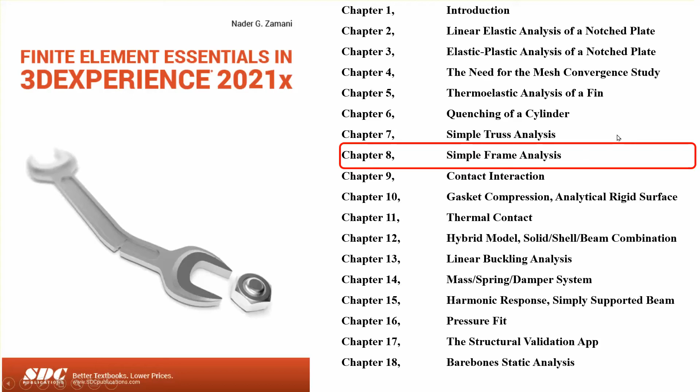Okay. So basically, we have a situation like this. We have a frame structure. These three pieces are welded together, therefore it makes a frame. And there are restraints that you can see here. Two of them are fairly straightforward. The third one is at a 45-degree angle, so we have to do a little bit of extra work here.

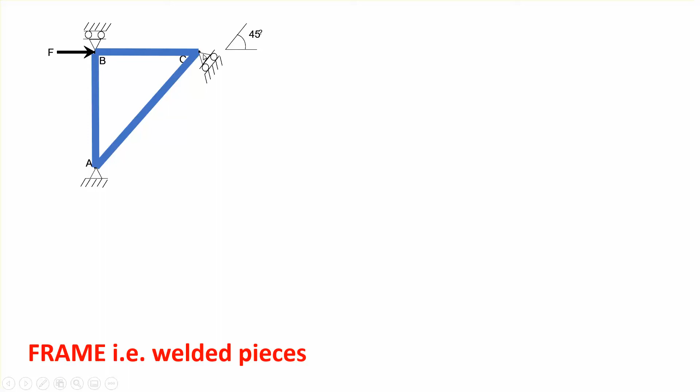And a load is applied, and the cross section of these three members, two of them are the same, and it's 24 by 24 millimeters squared, and the third one, the slanted one, is 34 by 34 millimeters squared. Okay, so what we're going to do is we're going to create 4 points and 3 lines. The 4 points, three of them are used to define the geometry of the frame, and the fourth one, which is down here, is used for specifying the orientation of the rectangle or the cross section.

Because remember, if the cross section is a circle, it doesn't matter how it's oriented. It's always a circle. It's perpendicular to the length of the member. But if it's a rectangle, for example, or anything but a circle or a circular tube, then the orientation impacts the deformation of the structure.

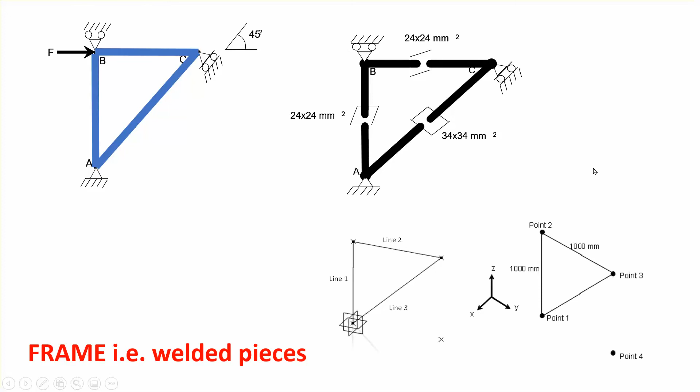So yeah, the coordinates are given here, and the material properties are standard steel, and the load is 1,000,000 Newton. Now, notice that when you do it as a frame structure, because the shape of the cross section and orientation is important, this is what you got. The top one is the 24 by 24 square cross section, and this is the slanted one, which is 34 by 34 millimeter.

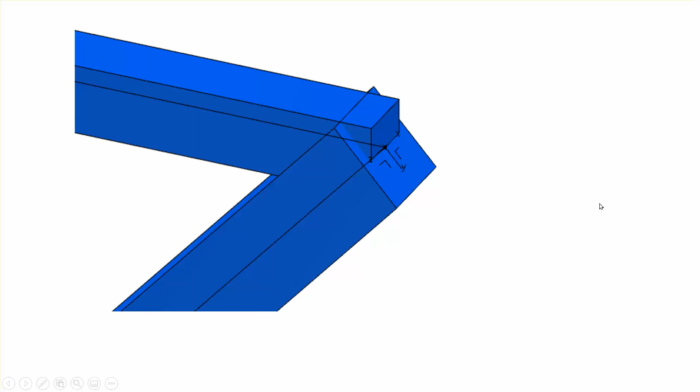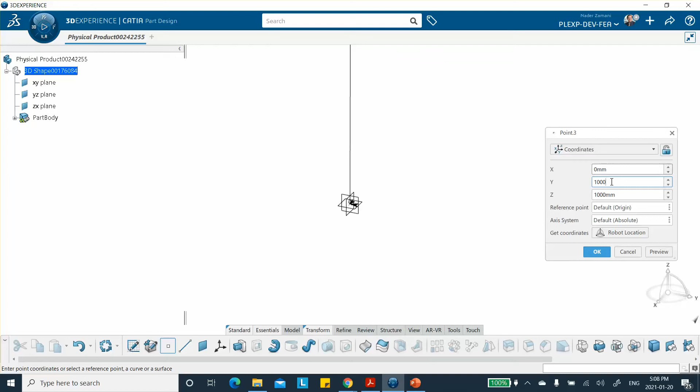Okay. So let's go ahead and do that. Let me start with the part file. I'm going to create 4 points. Let's make 0, 0, 0 point number 1. Then we go up by 1,000 millimeters. Then we go to the right by 1,000 millimeters. That's point 3. I think that's what you got. Let me see what you got here. Say okay, we may have to change some of these.

How many points do I have? This last one, I didn't need it, so I'm going to delete it. Okay, so let's put everything on the screen. So we have point 1, point 2, point 3. Okay, so we add another one, which is bringing it down to 0. So this is point 4. This is the orientation point here. So 1, 2, 3, and 4.

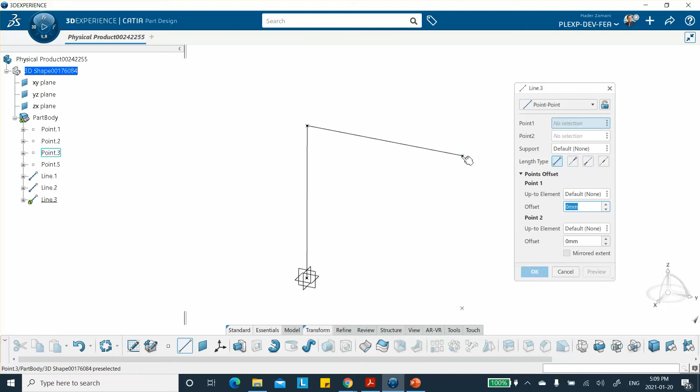Okay, good. Now we're going to create our lines. So here is line number 1 going from here to here. Line number 2 going from there to there. And line number 3 going from here to here.

Okay. The other thing is that when I did chapter 7, I did not create a local coordinate system. So to specify the displacement correctly on a 45-degree angle, I ended up rotating the coordinate system that the dialog box gave me. So here, as it's done in the book, I'm going to create an axis system. See that? The axis system.

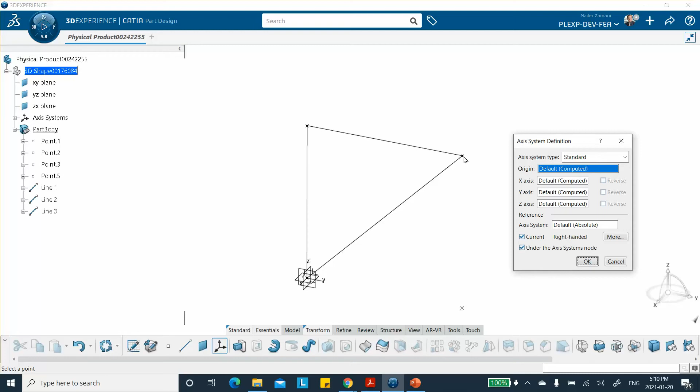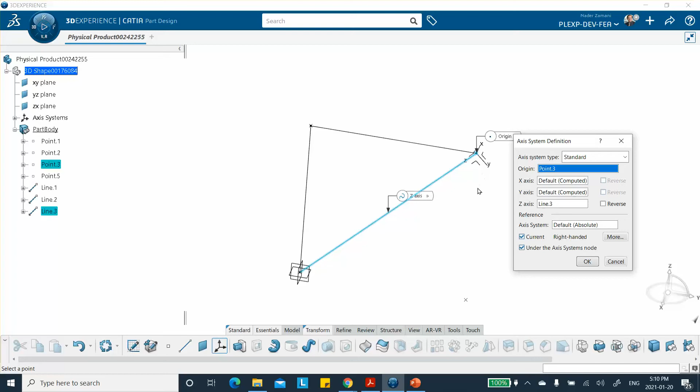It says, where is the origin? The origin, I'm going to place it right there. And it says, okay, how are you going to line these up? So I'm going to line it up so that this is my x-axis. I think in the book, this is your x-axis. Let me double check on that. Actually, let me just check. Sorry, the z-axis lies on this line. So z-axis, you select this, is on that line. Okay, so this is how it's done in the book, but as I said, in chapter 7, I didn't do it in this way.

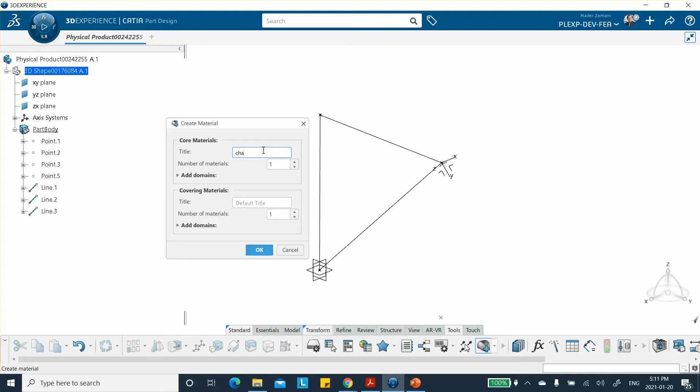Okay, so first thing we're going to do is save everything. Okay, so material. So let's apply our material. Add the material. Let me call this chapter 7. So it's going to create a shell for me with the name chapter 7 right there.

And I can specify the material properties right here by right clicking: simulation, structure, Abaqus multiphysics, mechanical, elasticity, elastic constants. This is 200e9 Pascal, which is going to convert it to PSI, and this is 0.3.

Now, if you wonder why I'm using PSI, because I was too lazy to change that. So in fact, if I go here, preferences, I'm going to go to stress. Let me maximize this. I'm going to go to stress and change that to Pascal.

Where is this pressure? Stress. Let's see, stress is somewhere here, right there. We're going to change it to Pascal, right there, and close it. So now, if you look at the properties here, you see that this is in Pascal, written in Pascal. Okay, good. Now I'm going to right-click, apply.

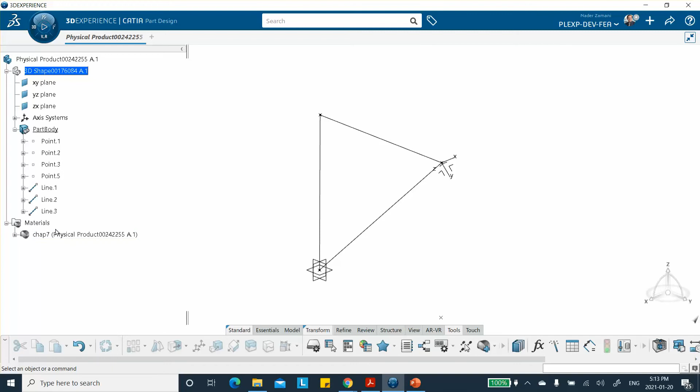I'm done with this window, so I can either minimize it or close it, and then I go to the part. You put it on the part, and basically apply it. So check mark, and there we are. Your material is right here, and if I double click this, the numbers are going to pop up. Now in the book, when I do these chapters, sometimes I do this thing differently. I create an empty shell here, and over here, when I double click on it, I fill it in. Okay, so slightly different way.

Now, the other thing I want to do is I want to hide these points, and there is a reason. Actually, point 1, 2, and point 3. 1, 2, and 3, I'm going to hide them. And there is a reason, because I will apply a force and some restraints at these points, and in some software, if you apply it to a point which is sitting on top of this vertex, it won't see it. Now I didn't try it with this program, so I'll just hide it so that there is no issue.

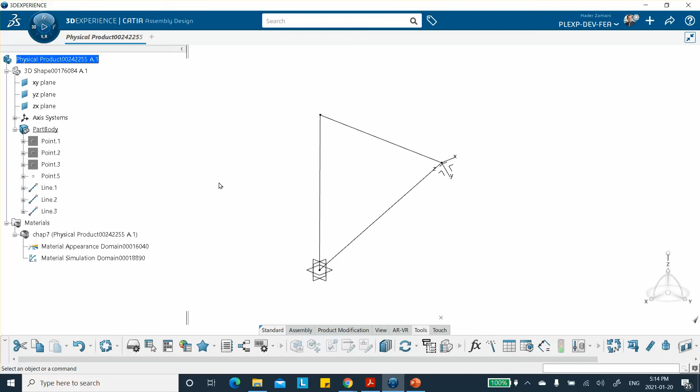With number 4 we have no problem. With number 5 we're down here. This has number 5 because I already inadvertently created number 4 and I deleted it. Okay, so that's fine. This one we don't have to worry about it. Okay, so we're done as far as this is concerned. Now we're going to go to structure model creation. We use all the defaults. Okay. So let me go ahead and mesh this thing.

To mesh it, notice that there is this hidden toolbar here. So there is a mesh there, right there. Okay. Notice that as soon as I went to structural model creation, it created the finite element model, but the elements and properties are not generated here yet. Okay. So first of all, let's go ahead and mesh this thing. So this is a beam element.

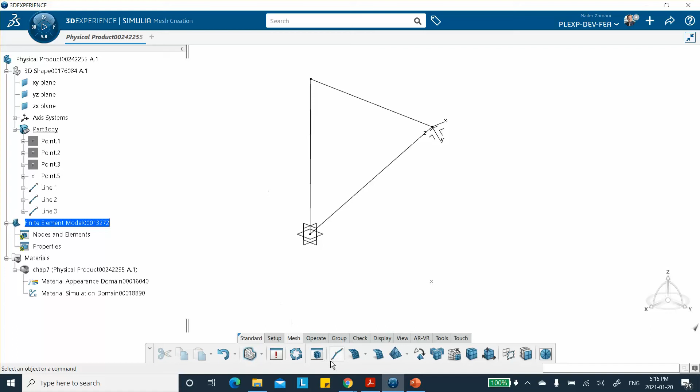Now, in the previous chapter, I put one element representing this entire bar. Now here, because I want to show bending, I'm going to make sure that the mesh size is 100. That means it will put 10 elements through that length, okay? And this is very important because I want the nodes from the top bar and the horizontal bar and vertical bar to be identical. That means if there are any nodes within 0.1 millimeter of each other, you may have to adjust this thing. For here it's okay, but in some problems you have to adjust it, okay? Then merge them, okay? So that's fine.

So did I select? Let's start with this one. Select this and mesh it. Notice that it put 10 elements to this. And then we say okay. We can actually do it simultaneously here, but I'd rather not, because the elements here will have a different cross section than this slanted one. So I better not do them all in the same dialog box.

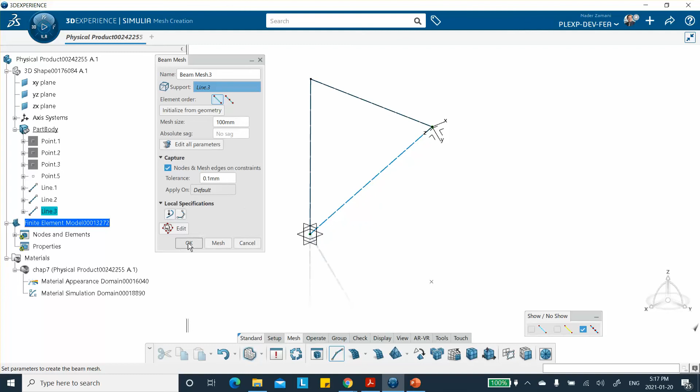So say okay, and then again, where's this? Then again, this one, everything is the same as before. Mesh. So put 10 elements here. These two I could have done at the same time, okay? And finally, that one, why don't we use that same meshing size, mesh, well, this is more than 10 because the length of this thing is more than 10 actually. We say okay. So notice that the elements have been created. Now we're going to have to do the properties.

Now, in order to do properties, first you have to say what kind of a cross section you have and how you orient it in space. Now, to do that, you can't do it in meshing. You have to expand this thing and go to model. See that? Model. You expand this, you go to model, and here are the different types of cross sections that you have. For example, you look at this last one. This is for beams and bars and things like that. First of all, the beam profile. In other words, give me the shape of that. So we have two profiles.

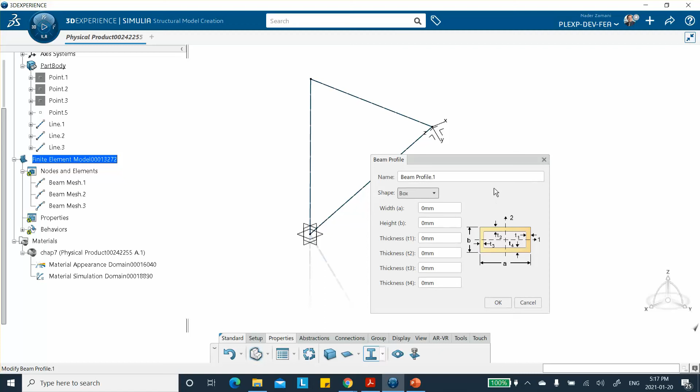Profile one, would it be a box, right? No, not a box. Cancel. Not a box. So I want a rectangle. Where is the rectangle? Rectangle right there. Okay. So it's going to be 24 by 24. 24 by 24. Okay, so this is profile number one. You can see that it's created here. Then another one. This is also a rectangle, but this one is 34 by 34.

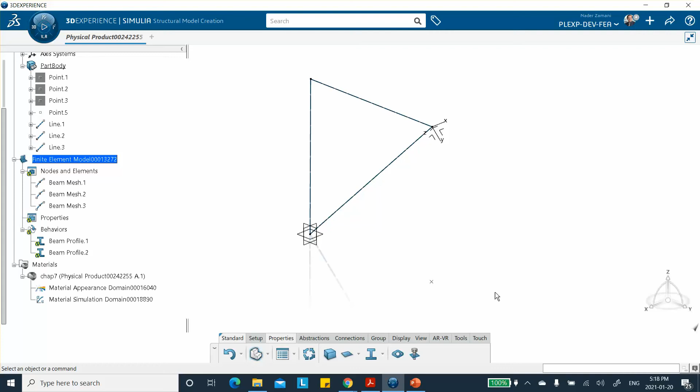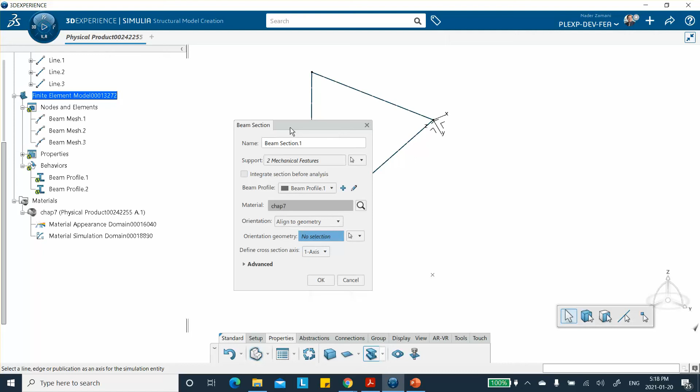Okay, good. Now that we have created the profiles, we can go and create the sections, okay? Beam sections. It's going to ask, what is the support? So let's do these two first, these two, okay? So this guy, can I do it at the same time? And that guy, too, these two have profile number one, and the orientation point is this point number 5 that I created here, and say okay.

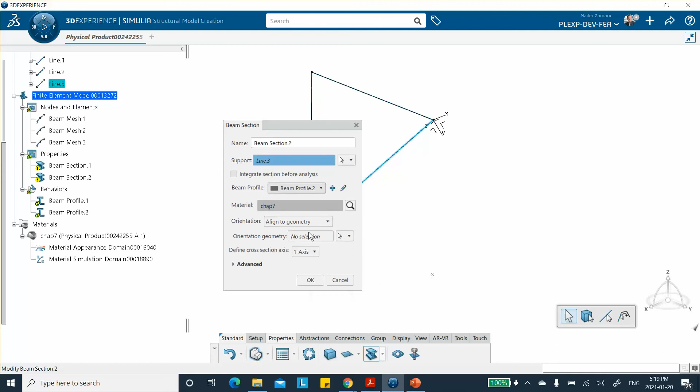All right. And for right, that's this one. And for the second one, beam section, this guy has profile number 2, and the orientation point is this one. The choice of the orientation point is, I don't want to say it's tricky, but if, for example, this is not the way I've drawn it, then you have to make sure that you understand what the orientation point does. So that's okay. I don't know why I didn't get the first one though.

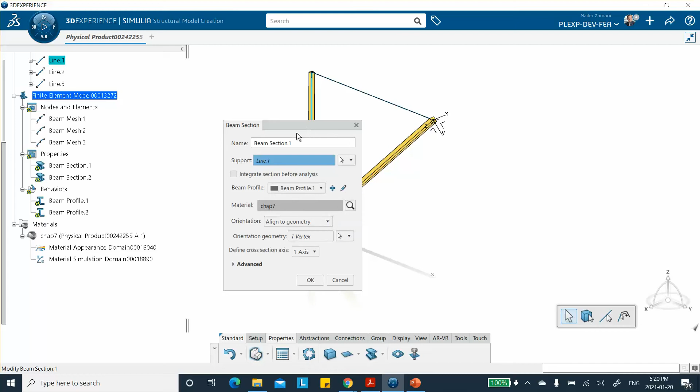Let's check this. Something is wrong here. Beam profile. I have a feeling that it doesn't like two of these. So let's try to get rid of this. Yeah, I guess you have to do this one for every line. So that's okay. And do another one. So for that one and profile number 1, for some reason this doesn't like it. So let me delete this.

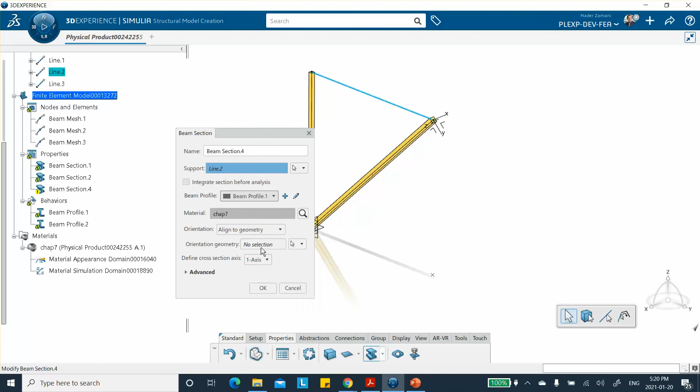Beam section. Okay, these two are okay. Let me look at the first one. It was just that one line. Okay, let's try it again. Section. This is the line that I haven't done, and the profile number 1 and the orientation point is this. I probably went over too quickly. So you can see that, relative to each other, this makes sense, 24 by 24, 34 by 34, and I was thinking that you could actually do these two at the same time, but it simply did not work.

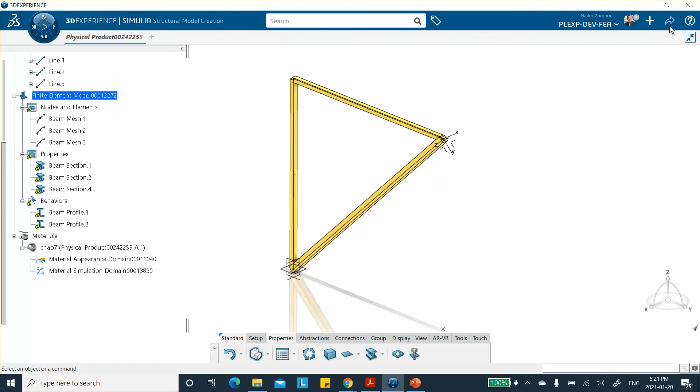Okay, good. Now, let's save everything. Save everything, and I am going to hide the lines and these cross sections. So we go to visualization management. First of all, don't show me the model. Don't show me the model. Okay. Notice that the lines were taken away. Don't show me the elements. There we are. Of course, there's not much you can do here. So show me the elements actually.

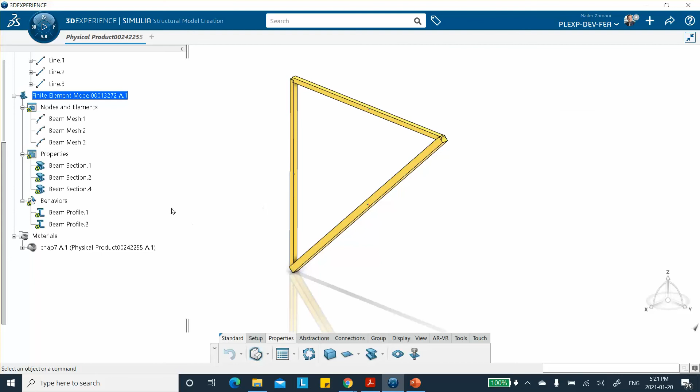Show. Now, if I want to hide these square cross sections, you have to literally go and do this, right click, hide, and you see only the elements. But that's okay. I actually need the lines because I'm going to apply my things on the line. Okay, so let me bring back the lines. I don't need the elements and nodes, but I do need the lines. Okay, very good. That's pretty much it as far as the model is concerned.

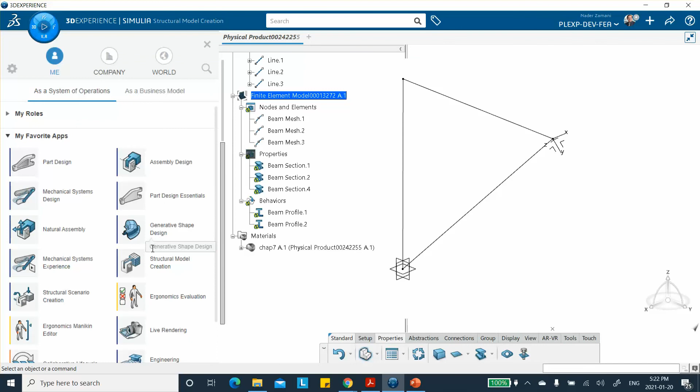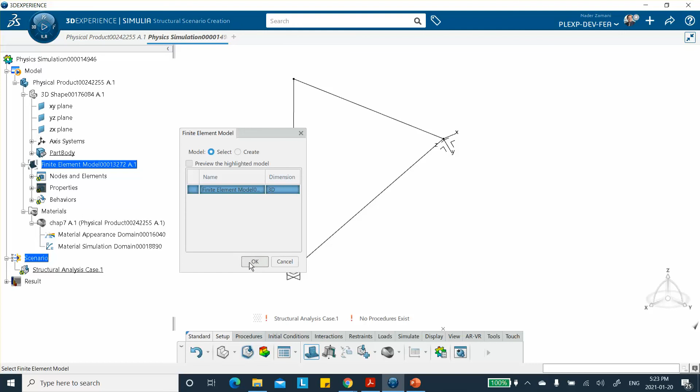Now we're going to go to scenario. So where is scenario? Right here, structural scenario creation. You're doing a structural problem. Notice that you have two red exclamation marks here because I haven't selected my elements yet. So you click on setup, you look for this guy, finite element model. There's only one that was created here, but you may want to create several finite element models. See the tutorial in chapter 4 that explains why you may want to do something like that. You say okay. Notice that the red exclamation marks turned into a green check mark.

Now we go into procedure. It's a static problem that we're doing. It's a linear problem, and here is the advanced option. Non-linearity included, not included. I'm going to take it off because I don't want them to be included. Okay. Now we have the restraints. So this is a clamp. This bottom point is clamped. Now, clamp for a beam element means that the translations and rotations are prevented.

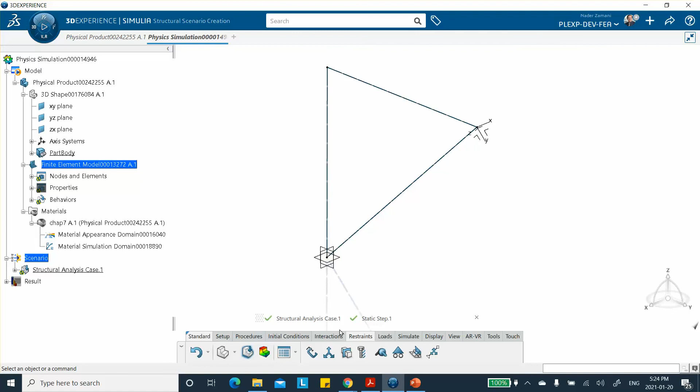All right. Now for the top point over here, we have to say what is prevented and what is not. So we click on it. So this top point, let's see now. It can move in the global direction Y, but not in X and Z. It's not coming out of plane, or going up because of the support. Now, as far as rotation goes, if we don't know, we can leave it alone like that. So I'll just leave it alone like this. Now, in the book, I'm trying to see what constraint I put in the book. Let me see for a second. I'm checking.

Okay, so for that top point in the book, just bear with me for a second. I clamp the bottom. That's fine. And on the top, yeah, that's exactly how I did it in the book. So we say okay.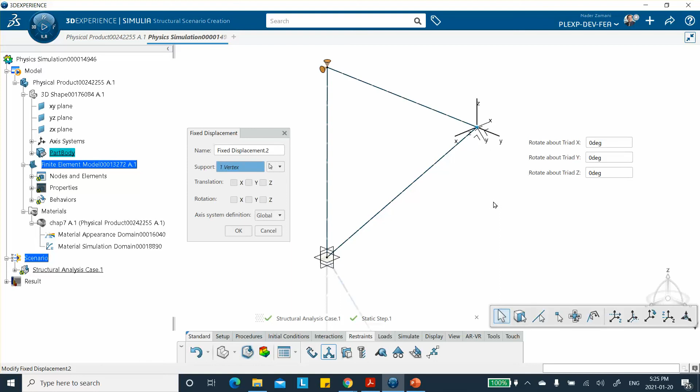Now for the one over here, so again, fixed displacement. You select that point. Now, in chapter 7, I did the rotation here and used this coordinate system, but I don't have to do that here because I created the coordinate system whose z-axis is along that slanted bar. So I'm not going to say global, I'm going to say specify, and specify is the one that I created. Well, it won't take it, so I say local, and I'm going to select the one that I created.

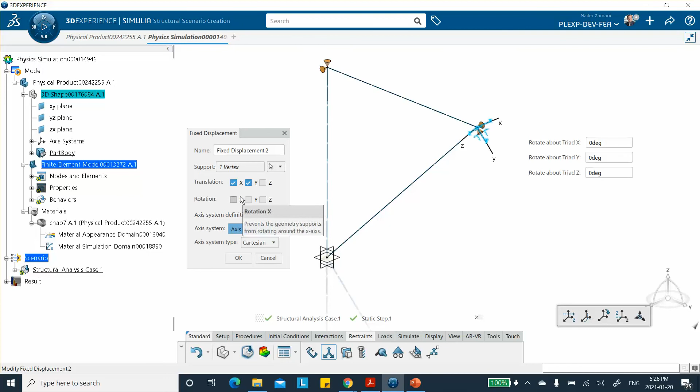Okay, so notice what I did: I changed the axis system to local, and I picked that thing, and it basically aligned the original one with the local coordinate system. Now, in that coordinate system, it can translate along the z direction. It cannot go in the direction x, nothing out of plane, and in the direction y, nothing into that support. Okay, and I leave the rotations free, and we say okay.

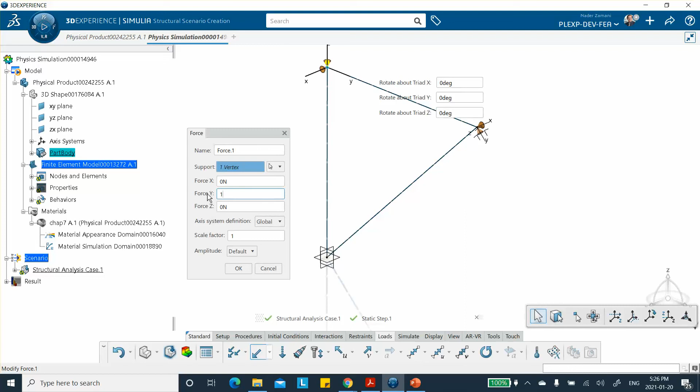Now, as far as the force goes, so load on this point, okay, force, where's the force? Right there. In the global direction, in the direction y, is 1 million Newton. 1, 2, 3, 4, 5, 6. And we say okay, and there is the force. All right, so save everything.

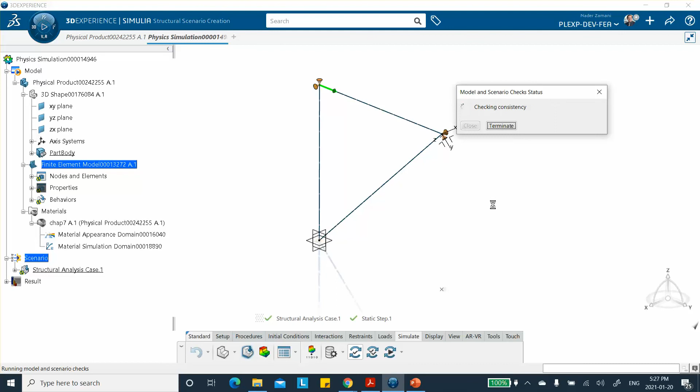We then go to simulate. Now, I advise you to go through all 3 steps because the first one checks the model. If there are any issues, it'll let you know. No issues there. Then this one checks the simulation. Make sure that you didn't forget stuff like loads and restraints. It's a very simple problem. It's highly unlikely you forgot anything. There may be some warning messages here, and it's a good idea to read those warning messages. I don't think we're going to get anything, but it's a good idea to do that.

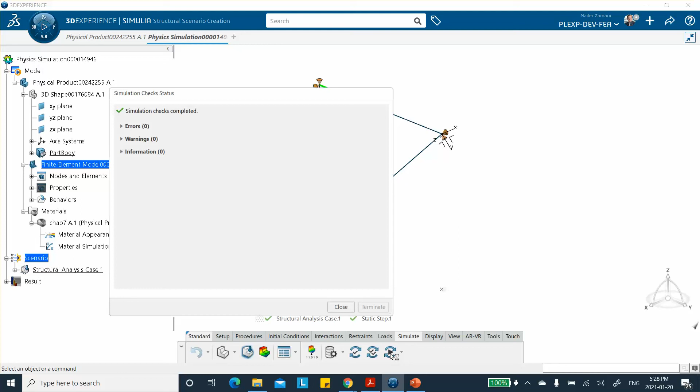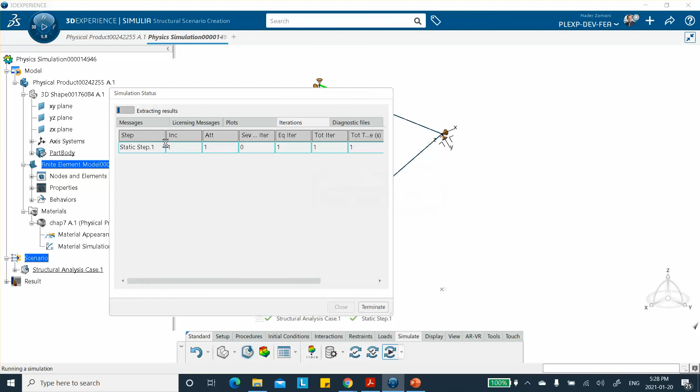And then finally, if everything goes well here, we're going to run it. This last one. Okay, no problem there. All right, it's coming along. It's a quick problem. And now if you get some messages, if it's doing iterations, it's not in our problem because it's a linear problem. In this case, it's a linear problem. It's going straight up. There's no iteration involved. Basically, one step. Okay. So very good. Close that.

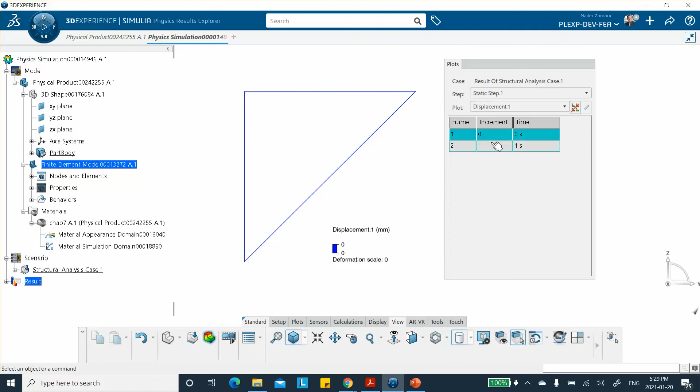I put this thing in the front view because this is a two-dimensional problem. There's the front view. Okay. Let's move this thing here. Select this and move it there. Okay. So let's look at the displacement first. This is step 1, of course. No load has been applied in the 0 frame, but this is going to be moving along that. In fact, we can animate this to see what happens. You see that? It's moving along the 45-degree ramp, and because these are welded, this is what happened. So let me stop this.

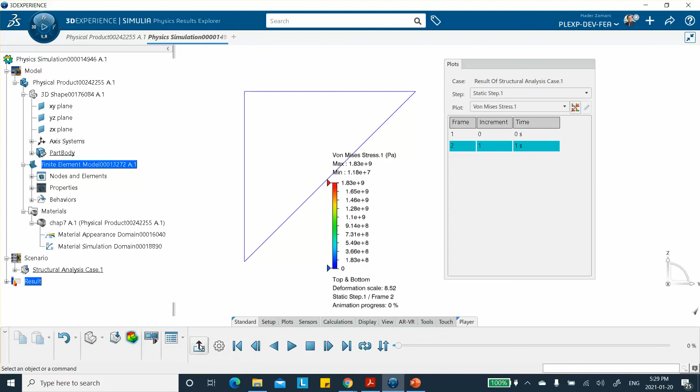And 11.7 millimeter, and then you can say, okay, show me the original, the displacement. Let me see now. This is the displacement, von Mises stress. I don't want to animate these things. Let me get out of the animation mode here. Okay, so there we are.

Now you have to be careful here because von Mises stress is different at every point of the cross section. You may want to look at the documentation of the way it's done in CATIA to see at what location it is giving you the von Mises stress. Notice that this is a constant. That's hard to know. You really have to look at the documentation or do some detective work to find out where it is. It may be actually the centroidal axis. Okay, so please check the documentation.

And now, hypothetically, if you want to get the undeformed configuration here. See, this is single plot. Every time you plot something, it deactivates the other one. So if you click on it, then anything that you plot is going to be superposed on this. For example, if you look at the undeformed model, there you are. The undeformed model looks like that, and the contour of stress looks like this, okay? And if you want to look at displacement, obviously it's going to be on top of this.

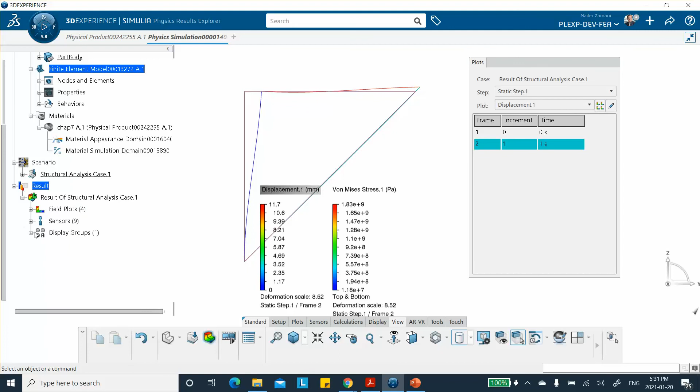Now, if you don't want to see these, get rid of these. One way to do that is find out what you have plotted and deactivate it. So these are my plots. For example, if I don't want von Mises, you put the cursor there, right click, deactivate, and it gives you the displacement and the undeformed.

Yeah, so that's pretty much it. This is how to do it video-wise, and with the book, you're in good shape for these types of problems. Good luck.